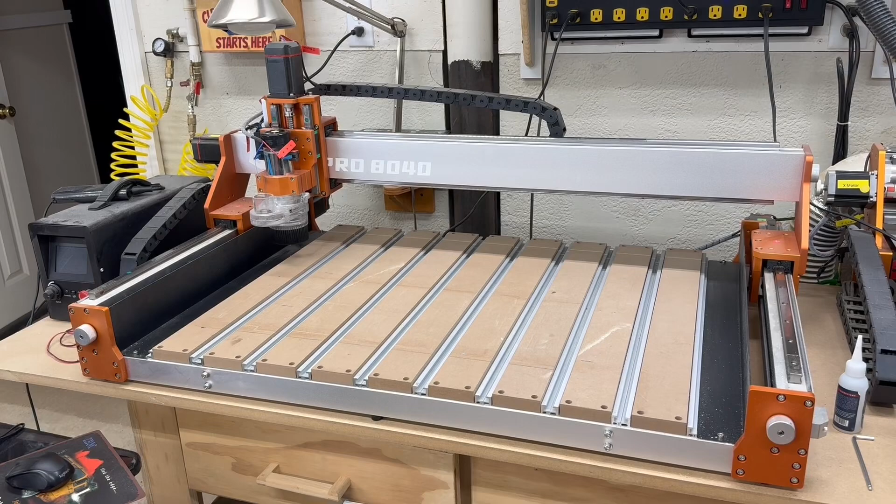Today, I'm going to be using the Fox Alien XE Pro 8040 to cut this out. I don't need to worry about having to do this all on one big sheet because I have a lot of scrap material that I want to use up. This is the perfect size machine to do this project.

I'll do one piece at a time, cut it out, put the next component on with the appropriate size of plywood, and then cut that out.

I've opened up VCarve Pro and I'm going to create a new file. This is going to be a single-sided job, and as far as the size of this material, I really don't know exactly the size yet, so I'm going to put in 700 by 700 millimeters. The thickness of the material will be 12.2, based on the measurements we took using the jig in a previous video. We are using millimeters today, and I'm going to use the machine bed to set the Z0 position.

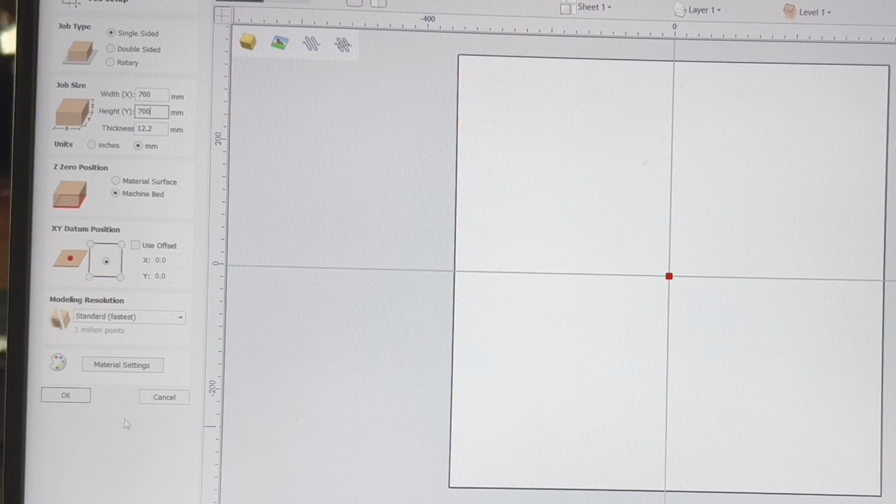I'm also going to set this up where we're working off of the center point. Later on, when we get ready to do the tool paths, I'm going to switch over and use the bottom left corner, but using the center point is much easier to do the design work. So with that, I'll hit OK.

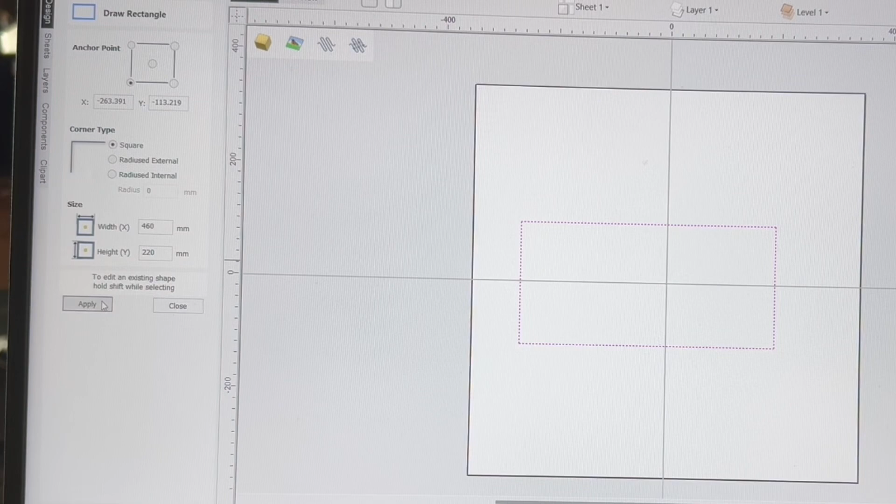The first thing I want to do is come up here to the draw rectangle, select that, and sketch in a rectangle. As far as the size of this rectangle, I want to make this 460 millimeters on the x-axis, and on the y-axis I want this at 220 millimeters, and we'll hit apply. So there is the basic shape that we're going to start with for the first shelf.

Now I want to have this centered into the material, so we'll come up here to the alignment tool and select center to the material, then close that. This gives me the references I want to be able to use to work with.

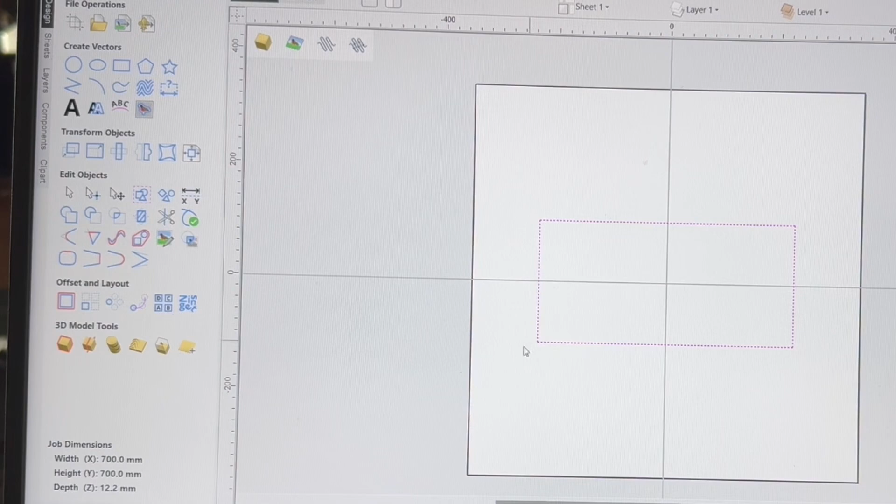The next thing I want to do is create the tabs. We're going to have 2 tabs here, so I need another rectangle. I'm just going to come right up above and draw out a rectangle. So what size do I actually need this tab?

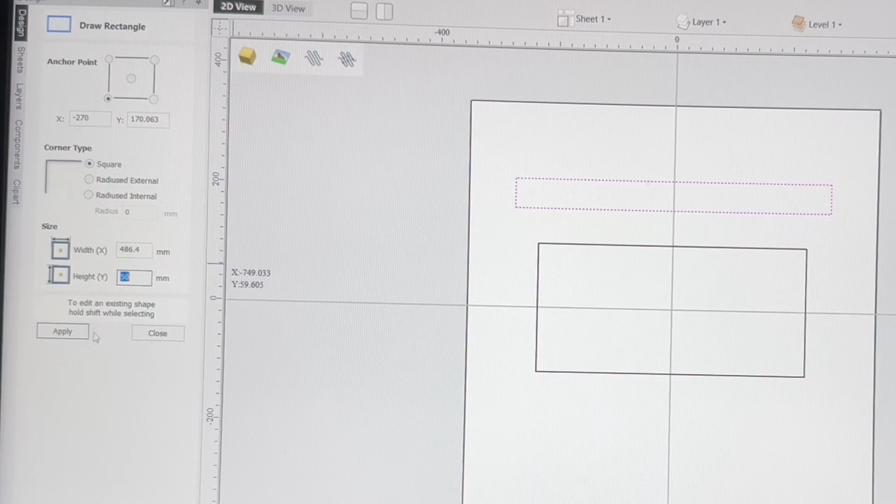I need it to stick through the thickness of the material, which is 12.2, on both sides, so that's 24.4, for a total length of 486.4 millimeters, and we'll hit tab. The thickness of this on the y-axis is going to be 50 millimeters, which will be consistent throughout the project. I'll hit apply, then close this out and slide it right down into this spot.

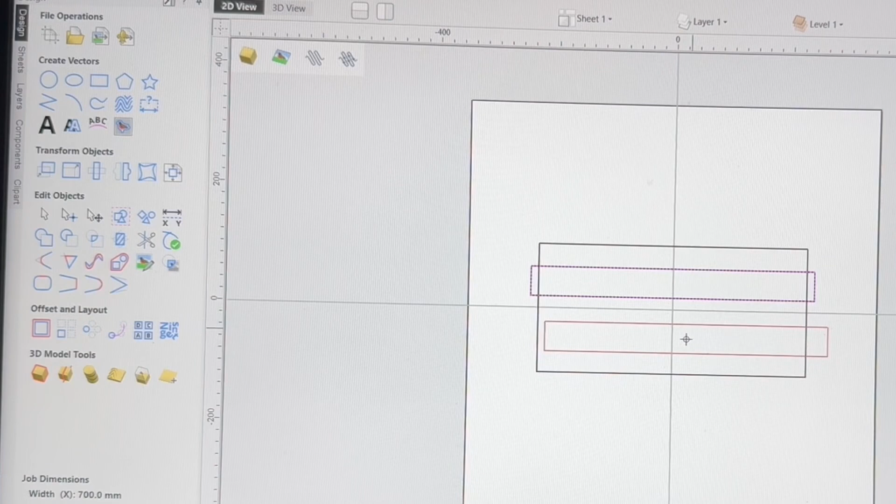You'll notice that this will snap right into the center. Now that takes care of the x-axis. I also need a second one, so I'll hit Control-C and Control-V, slide that one down, and let it snap into place also.

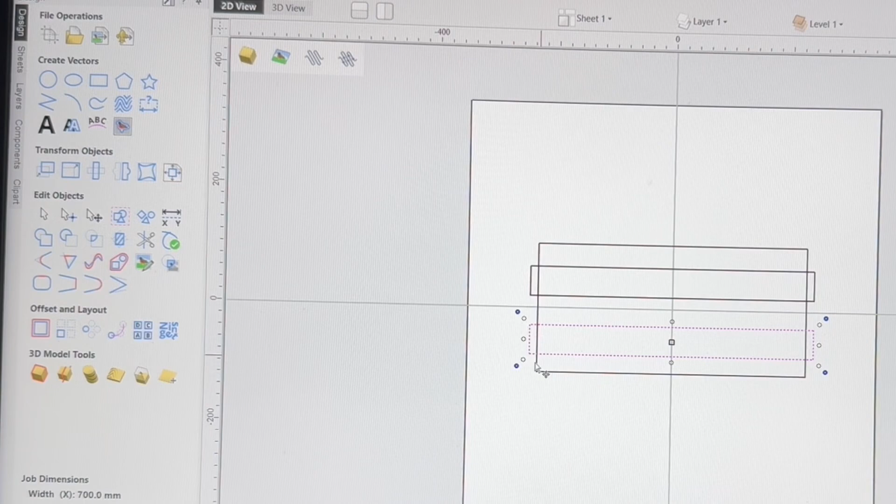Now we need to figure out how we're going to set this up on the y-axis. The easiest way to do that is knowing this is 220 millimeters, and these are 50 millimeters each, which leaves a difference of 40 millimeters between these two. I'm going to come over here to this tool, the Move Select tool.

I want to be able to click on this tab. I'm going to come up to the absolute, and I want to have this on the bottom row. It doesn't matter either one because it's going to reference off of this line, and I want to reference off my center line.

I want to be able to have this from this point to this point at 20 millimeters. So I'm going to put in right here 20 millimeters, hit apply, and that will move it down exactly where it needs to be. At this point, this distance is 40 millimeters. This will be 20 millimeters to the center line, and then we'll move this one right here.

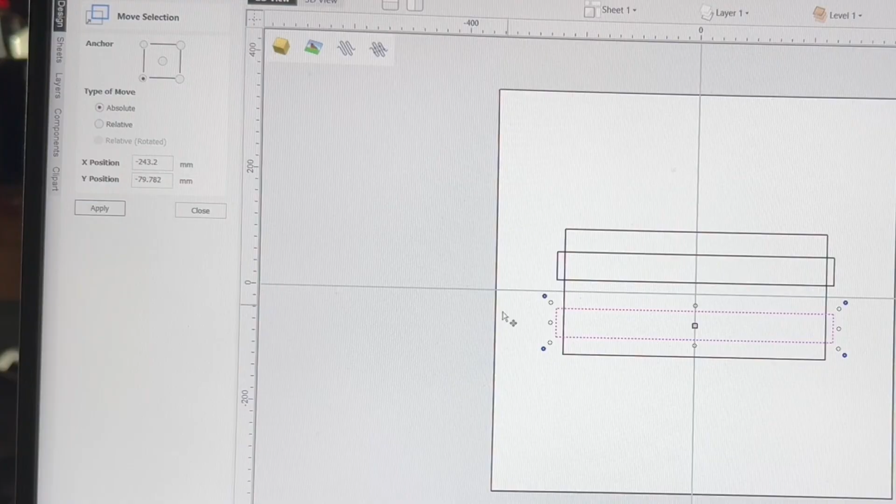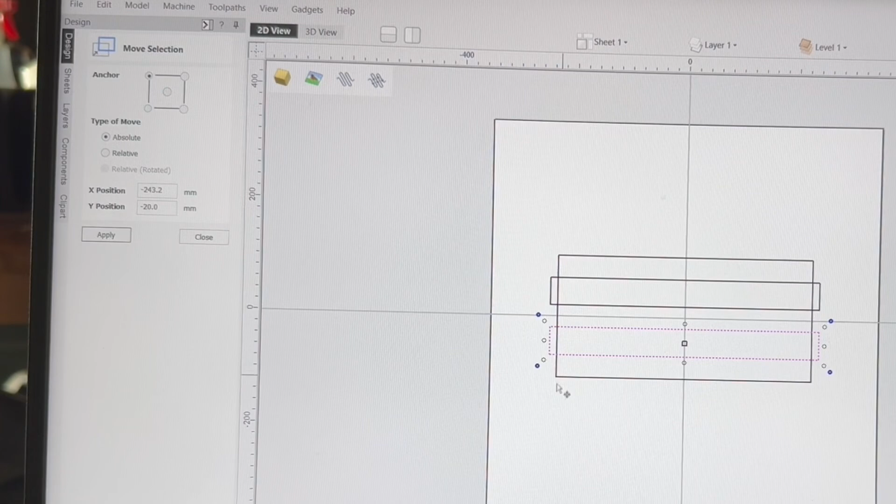Now I want to click on this one and show you how to set this one up. We need this 20 millimeters from the center line down to this point. To do that, we'll come over here to the anchor point and select the top, referencing off of the top of this line. I'm going to put in negative 20 millimeters and hit apply, and that takes care of it. So at this point, I have 40 millimeters here, 40 millimeters in the center, 40 millimeters here.

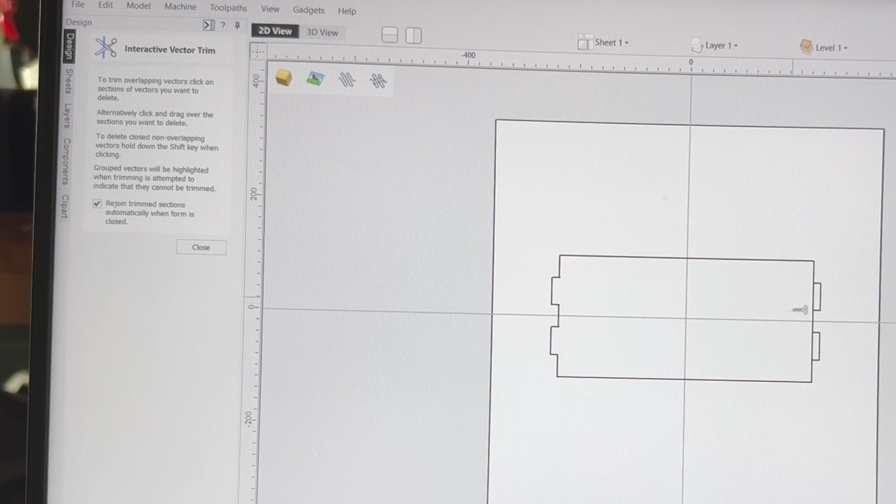And that literally takes care of the shelf. Now we have some extra lines that we need to get rid of, so I'm going to come over here to the cut tool and we'll clip these out. Control Z, we'll put that back in. Clip on this, do the same thing over here. And this is now completely done.

Now you do want to make sure that you have this rejoined the trim sections, so make sure that that's checked. But at this point, this component is finished.

Now I'm going to need a total of 4 of these shelves. Now that this component is finished, and I know that I need 4 of them, I want to highlight this and hit Control C and Control V. That will give me a duplicate, and that will be set aside because that'll be 2 of the shelves.

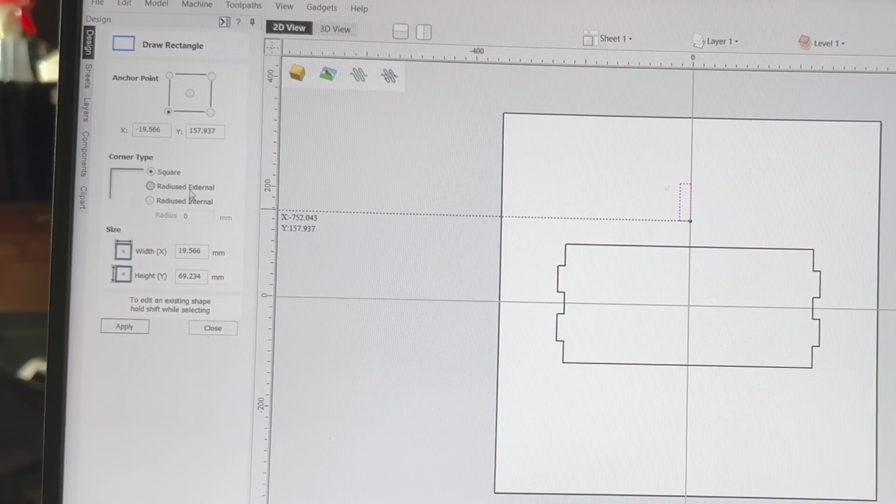Now what I have left is that same shelf, but on 2 of them, I need a slot right here in the center. So let's go back to the rectangle tool, and I'm going to put in just a slot. What size do I need? I need that slot to be 12.2 millimeters on the x-axis, and 50 millimeters on the y-axis, and I'll hit apply.

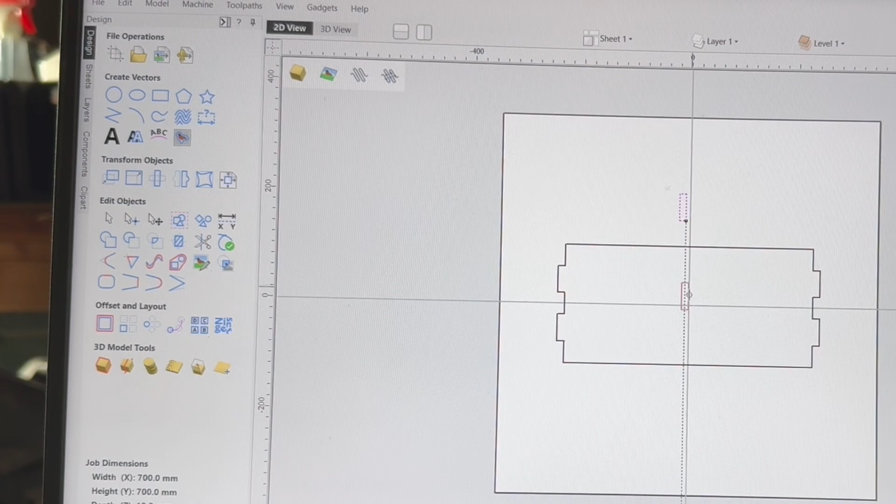With that done, I'll close it, and I'll take this slot and come right down here and center it. You can see how that snaps right into place, so I know that is exactly in the center. Now this shelf is actually complete, and I know that using these center lines, everything's exactly where it needs to be.

I do want to zoom in because there's one more thing that we need to do. We need to be able to put in the dog bones in this. To do that, we'll come over here to this fillet tool, click on it. I know that the radius of the tool I'm going to be using is 3.175 millimeters, and that's an 1/8 inch bit that I'm going to be using.

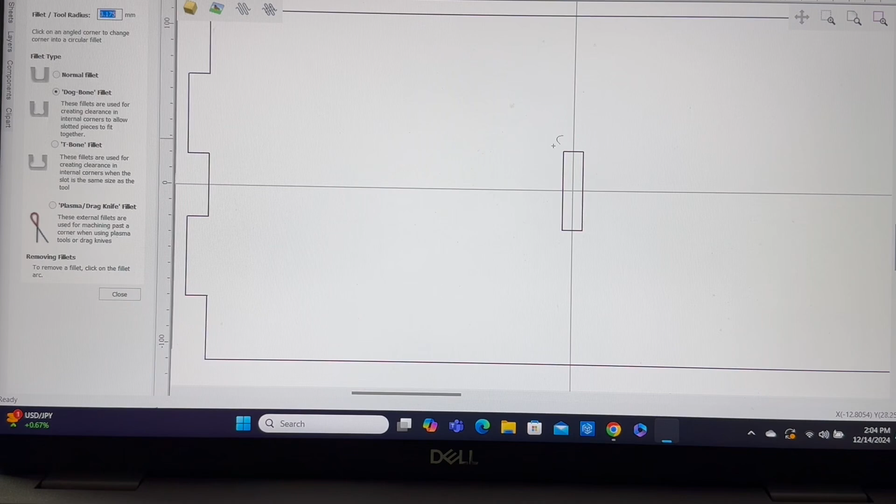I'm going to use the regular dog bones. With that done, I'll come over here, and you'll see as I get close, that check mark shows up. That's all I need to be able to do. It doesn't have to touch this, I just need to have it where that check mark will come into play.

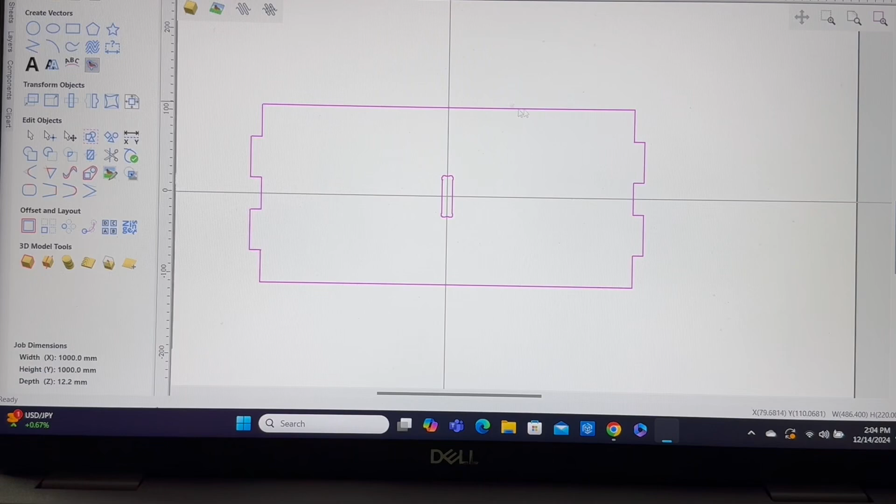And now the dog bones are in place. I can close this. I'm going to zoom back out, and now I want to be able to group this all together. And we'll click to group. Now you see how the color changed, this is now a component.

Now for all of the slots that I do, I'll be putting these dog bones in, but I'm not going to take the time to show on each and every dog bone that needs to be placed in there. It would just take up too much time.

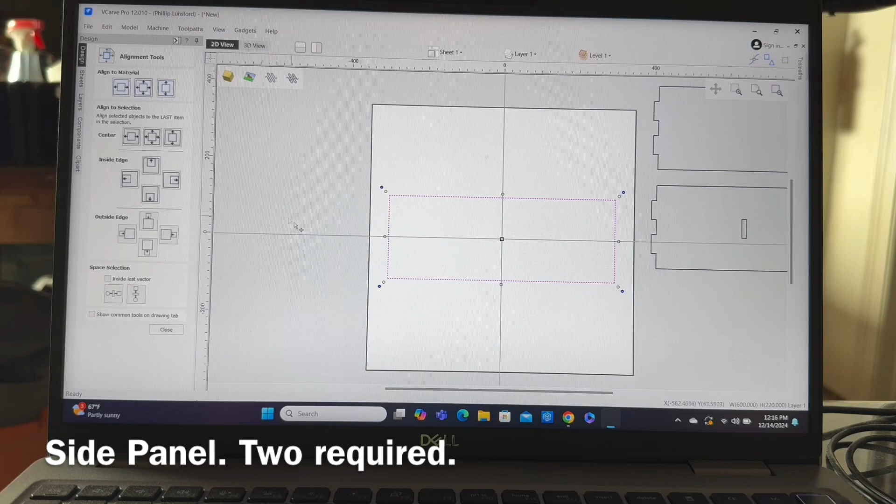I want to come back to the rectangle tool, and we're going to make another rectangle. This rectangle needs to be 600 millimeters on the x-axis and 220 millimeters on the y-axis, and we'll hit apply. Also we'll close this out, come back to the alignment tool. Let's make sure that it's dead center, and now it is. So now we have something to be able to work with.

Now at this time, we need to be able to put in all of the slots to make up the shelf. Now I need to be able to put in those slots. So I want to take this one right here, this shelf, and hit Control C and Control V. That will give me another shelf to be able to work with.

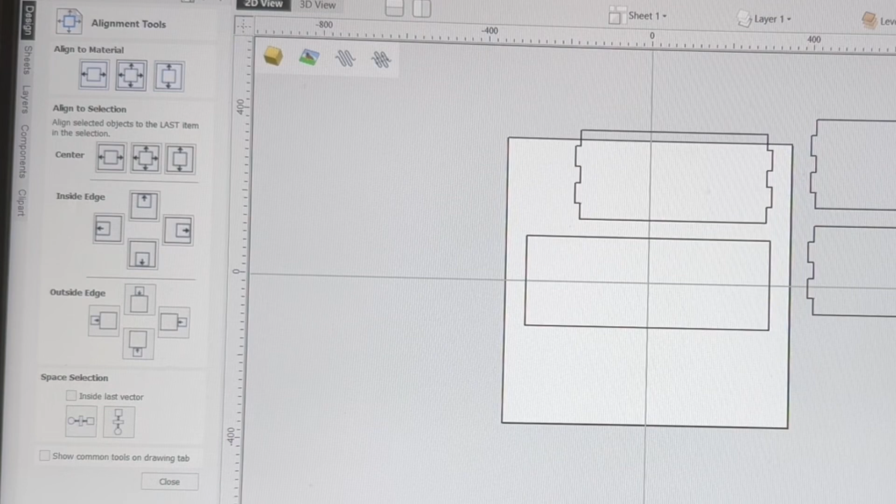Now the only thing I really need is this end where the slots are. So we're going to have the original over here, and I want to close this out now. I want to highlight this, come down to the edit node mode, and I want to come right in here, and it can be anywhere, and I want to be able to cut the vector and do the same thing down here, cut the vector. All right, so now this is going to be a separate section.

This area right here I don't need, I'll cut it. And that's it. So now let's zoom back in.

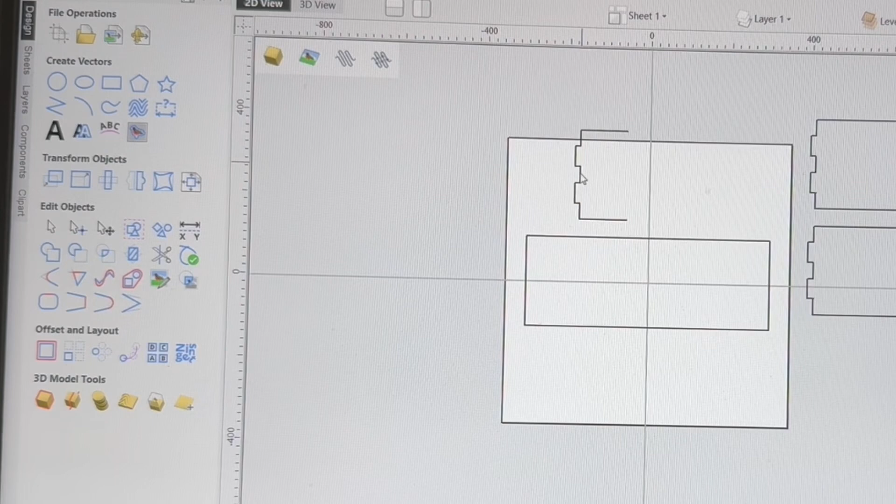I want to highlight this area, and I want to bring that down into this area. Now we're going to work off of our center and come out this way to be able to put these tabs in.

Now the first thing I want to do is align it. Let's zoom in closer where you can see that. Now right now, if you look at that, it should snap right into place.

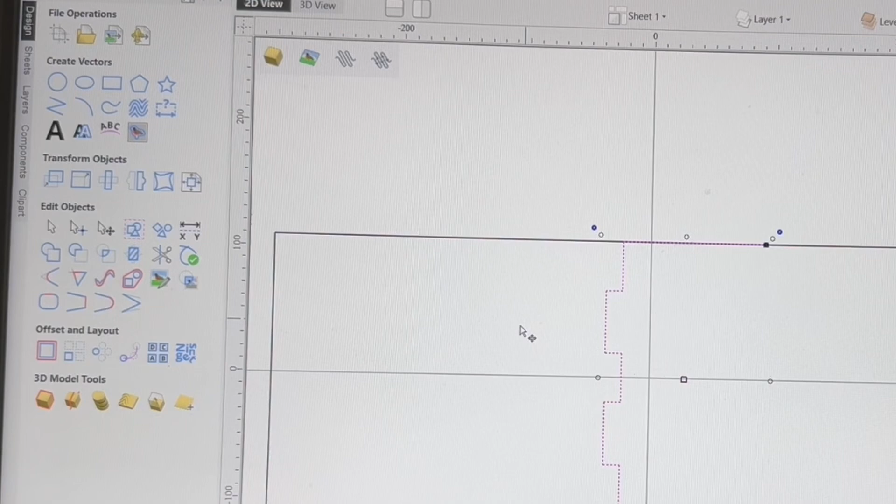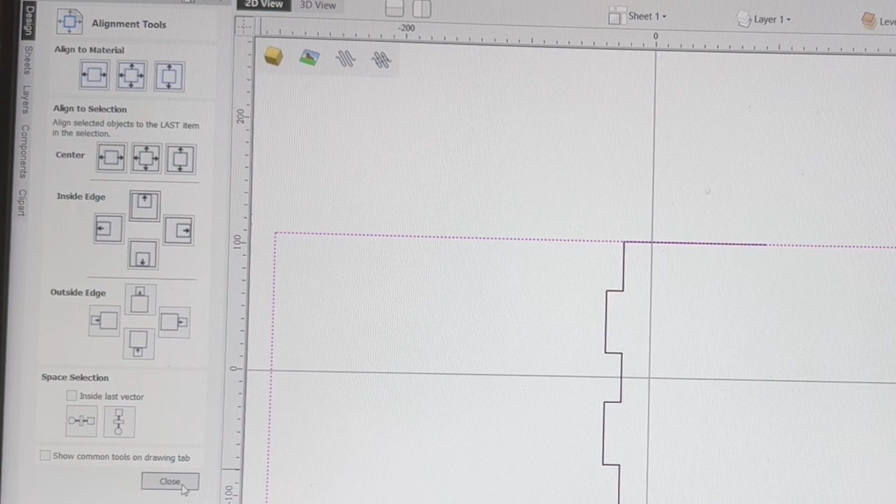To be able to make sure that happened, I wanted to go back to the alignment tool. I want to select this item, then select this top line, and come to the inside edge. You can see the snapping of this center point worked, but this verifies that it's exactly where it needs to be. Now I need to make my slots, and they're going to be this size right here.

So I'm going to take my rectangle, and I'm just going to drop one in close right here, and let's put in the measurements. I know that slot needs to be 12.2 millimeters by 50 millimeters, and we'll hit apply.

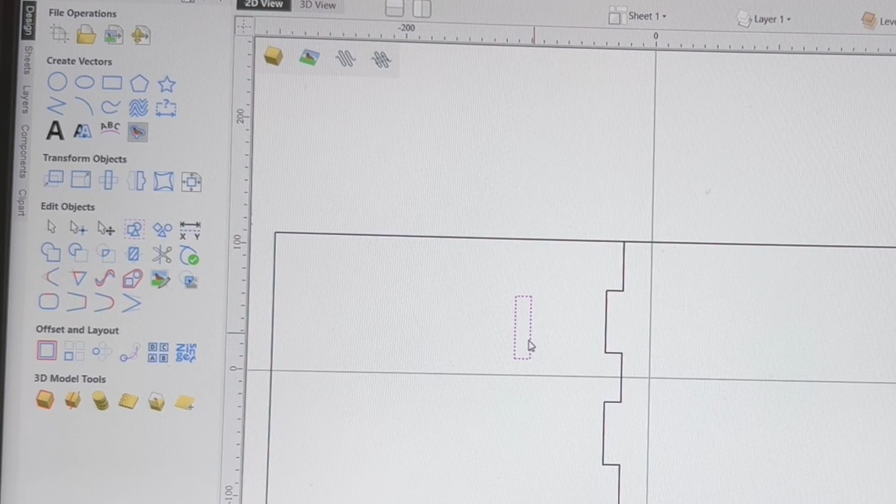I want to make a copy of this one, so Control C and Control V, and we'll slide this down here. So let's take this first tab and slide it right over to here.

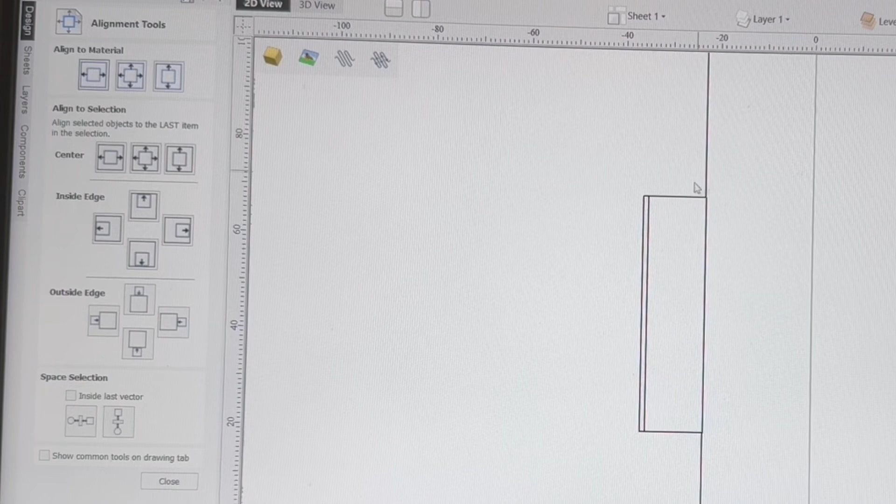Now this snapped to the center on the y-axis, but I wanted to make sure it did not snap to the x-axis so I could show you this. So I want to click on the tab itself, hold down the Shift key, click on the object itself, and this time we're going to align it to the inside edge to that point. And you can see how that gives you the perfect alignment.

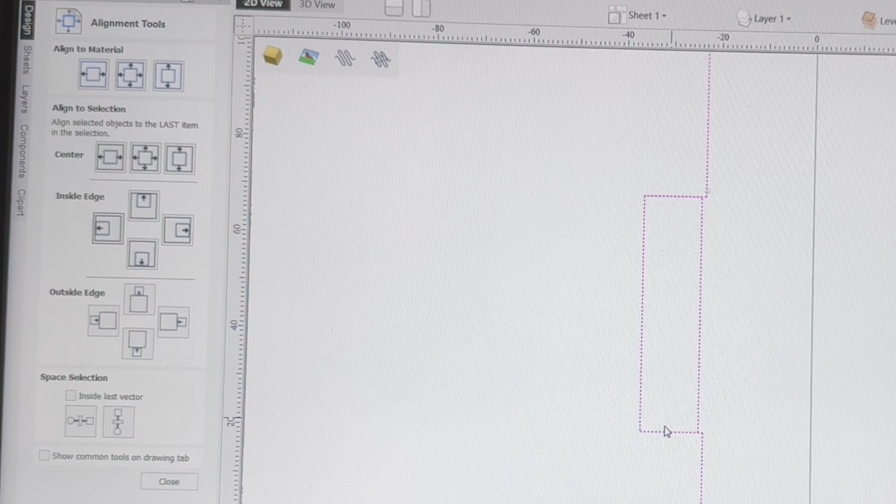Now I zoomed in real close so you can see it, and this snapped right over here to where it needs to be. The only thing I need to do is align it to this. So we're going to come back to the alignment tool, and I'll click off of it so I'll show you the whole process. We'll click on the tab, hold down the Shift key, click on that, and hit this. And that brings it over exactly where it needs to be.

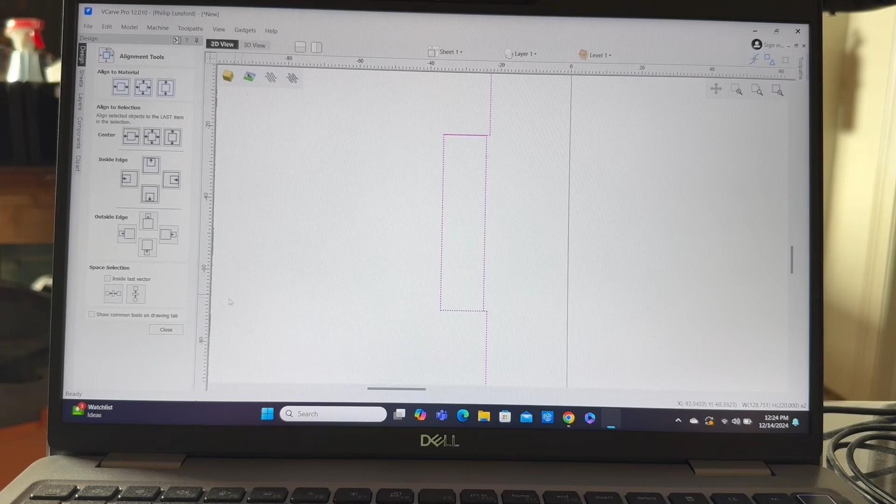Now you can see both of the tabs are exactly where they need to be. The next step is I want to group this together. We'll close this, come over here to the Group tab, and now we have one object.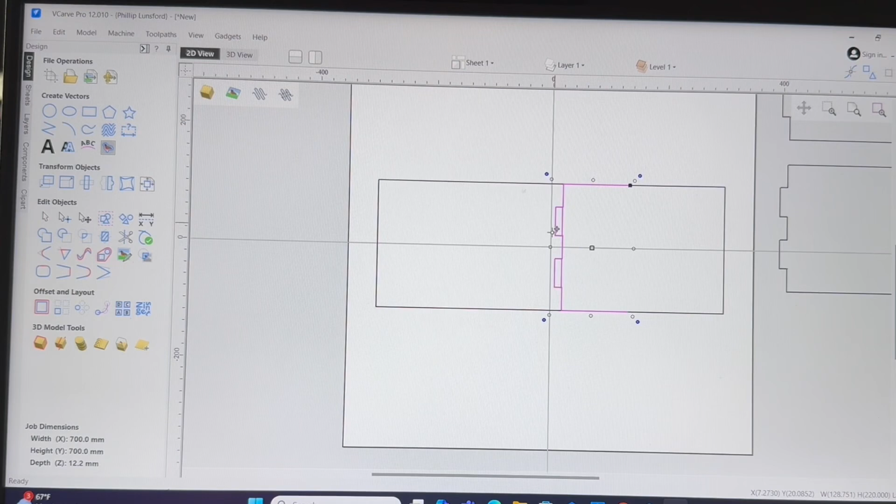So now I can move this anywhere that I want. So I want to be able to reference off of my center line again. I'm going to zoom out just a little bit, and we're going to start putting in the tabs. You can put these tabs anywhere that you want, depending on the size of the shelf. Now if I put this right into this area, this will identify the first location of the tabs.

Now if I want to see exactly where that is, bring over a guideline and you can see it was minus 220. Again, you can see the minus 220 there in that box. So that's two ways that you can see exactly where it's located. Now I don't need this guideline, so I'm just going to click on this and delete it.

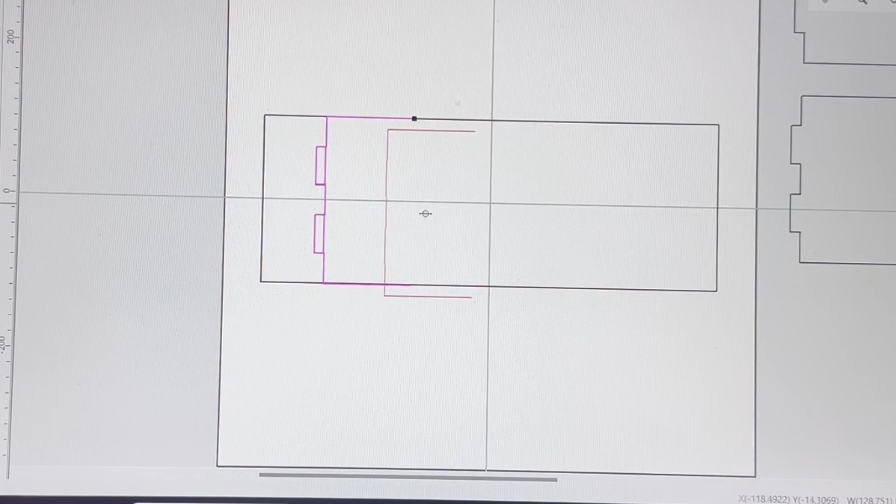And then I want to be able to make a copy of this. So Control C and Control V. I'm going to slide this down. Now at this point, let's use the Move Selection tool.

I'm going to come over here and watch this. I want to have this on the absolute. I want to have it on this side, and that's 109 on the x-axis right now. We're going to leave the y position alone, but I'm going to move this up to 120. So that's going to be a minus 120, and we'll hit apply.

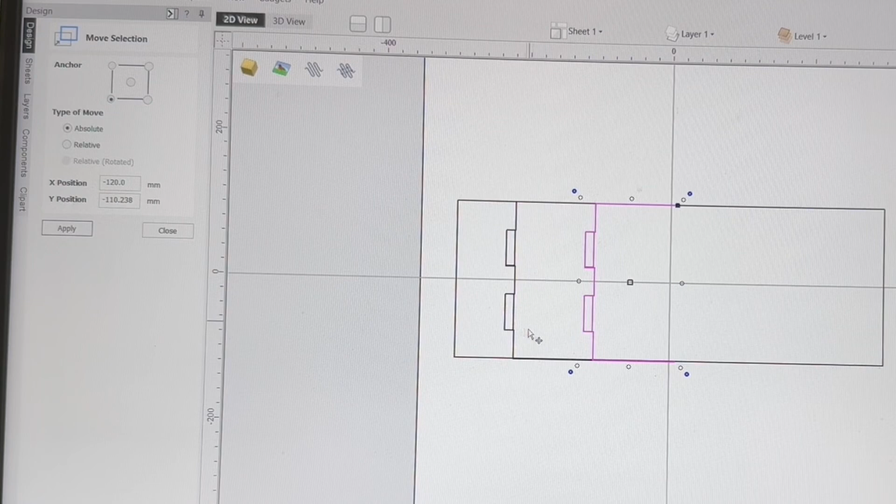And you can see how that moves it right where you need to have it. So now I'm going to do the same thing. We'll close this. What I'm going to do is make a copy of this, Control C and Control V, and we'll slide this down.

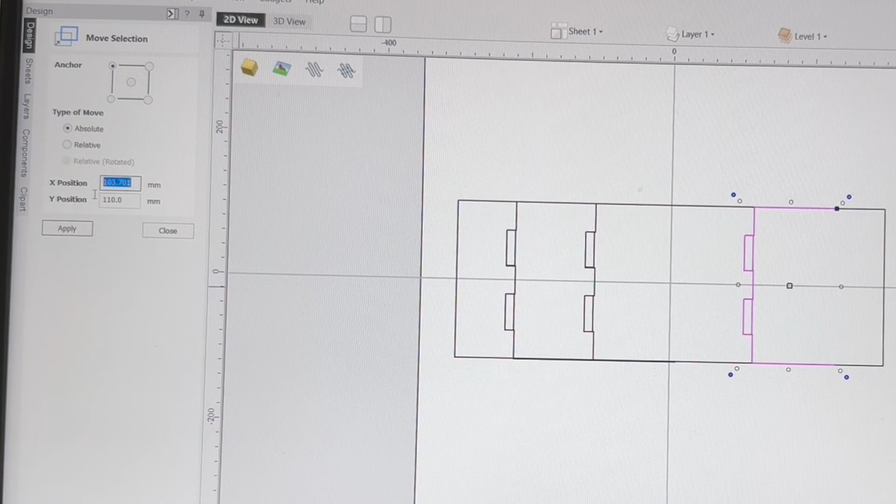Now if I want to keep this symmetrical, I want to take this one right here, come back to Move Select tool. We're going to make it absolute again, and we'll click on this left side, and I want to apply this at 120. So that's going to be 120, and that's going to be on the positive. We'll hit apply, and that now has equal spacing from here to here and here to there.

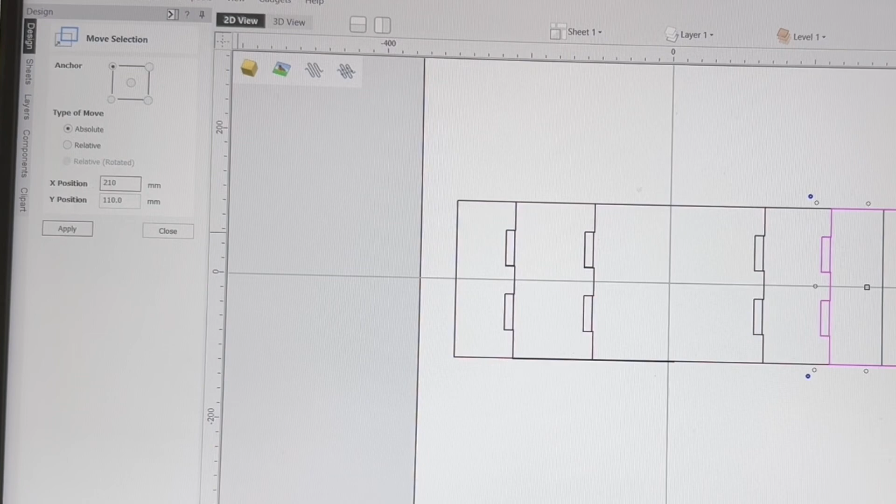Last thing I want to do is Control C and Control V, and we'll do the same thing again. We'll slide this down, and we're going to measure from the center point, over to where the tabs need to be, using 210 millimeters this time. I'll type in 210 and hit apply. That will move it right over to where I want it, and then I can hit close.

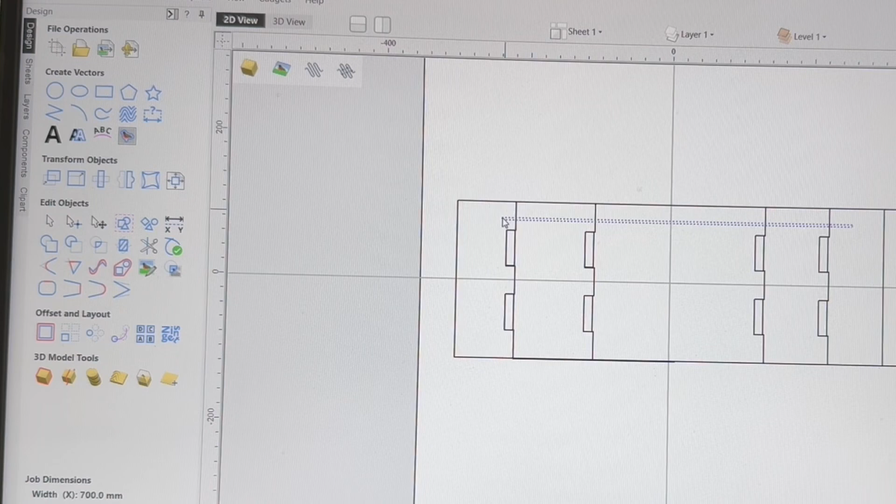That has all of the tabs now in place where I want them. The next step is to be able to highlight all of these tabs and the little components we're using for the alignment, and ungroup them. Then I want to come in just to that little section and delete the guideline that we had, and that leaves all the tabs in place.

Now I also want to put a back in here, and I want that back to be recessed so that I can have the cords hidden for as much as I possibly can. So we're going to have this set up at about a 40 millimeter depth. That should be able to handle all of the cords.

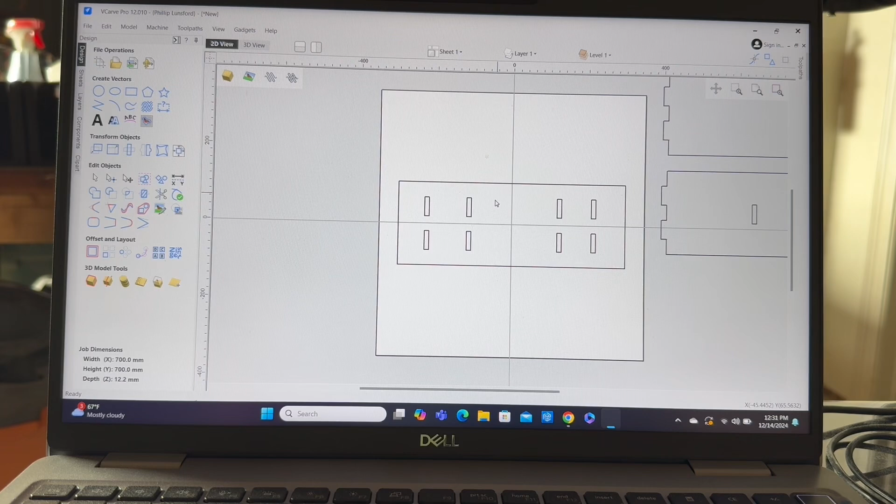But what I need to be able to do, let's zoom in. Let's come over here to this measure tool, and let's measure from right here over to this point right there, to the edge of that shelf, and that's 227.4.

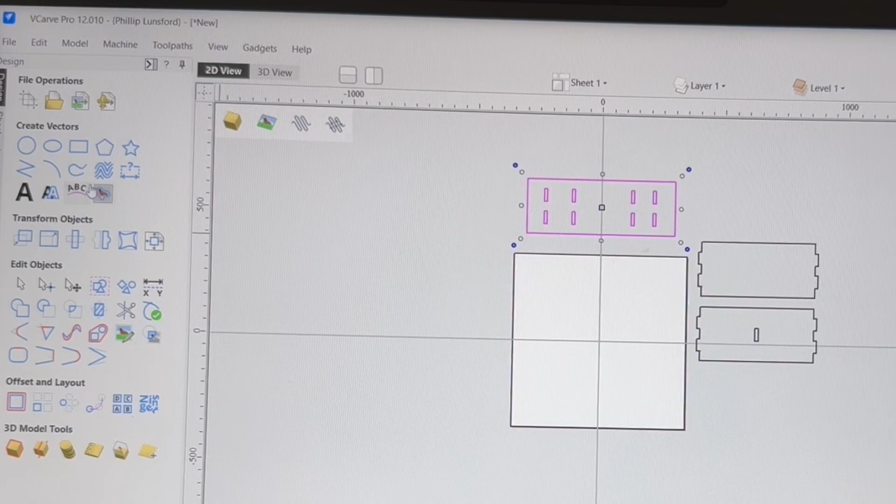Okay, now that I have the shelf out of the way, I want to be able to make the backing, that backboard that's going to go right into this area. So let's go up here to the rectangle tool, and we need to make that shelf, or that backboard actually. So we know that needs to be, so let me zoom back in so we can see this a little bit better.

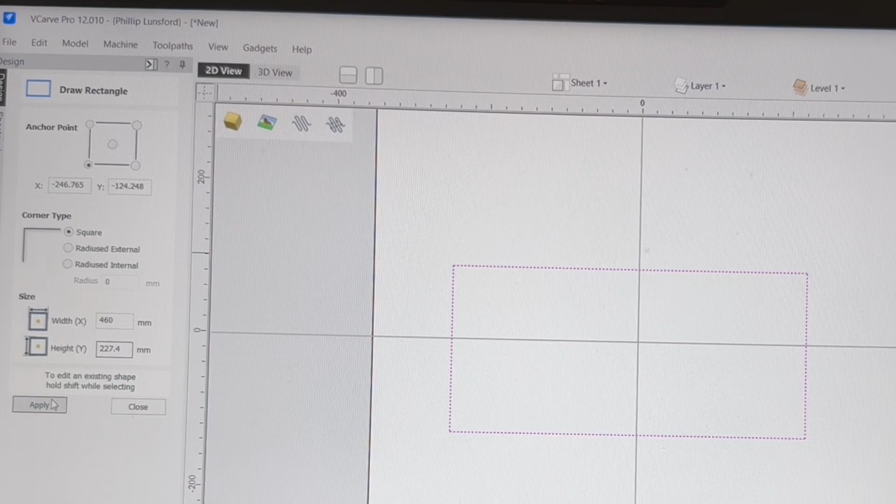So we know that on the x-axis, that is going to be the 460 millimeters. And on the y-axis, we just measured that, and that is going to be 227.4 millimeters. And we'll hit apply. So that's going to take care of the shelf.

We'll close it just like we did before. We'll hit the alignment to make sure that it's centered to the material. Close that. And now we need to bring in the tabs.

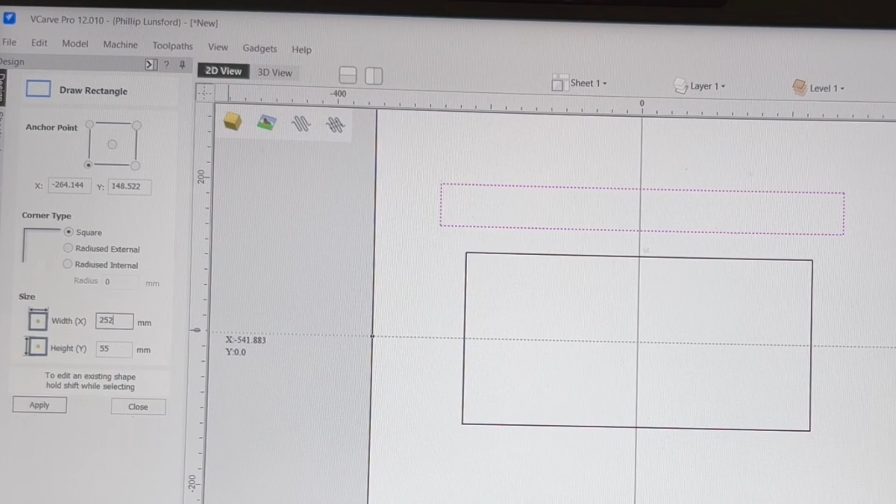Now this is created exactly as we made the shelf before, so I'm not going to go through the repetition of creating another one. We're going to skip to the end, and I'm going to show you how we're going to set this up to put the tabs in place.

Okay, at this point, the backboard is completely done. Now I want to first make a copy of this. So Control C and Control V will give me a copy, and I'll set this out of the way because that is going to be a component that we'll need to cut out.

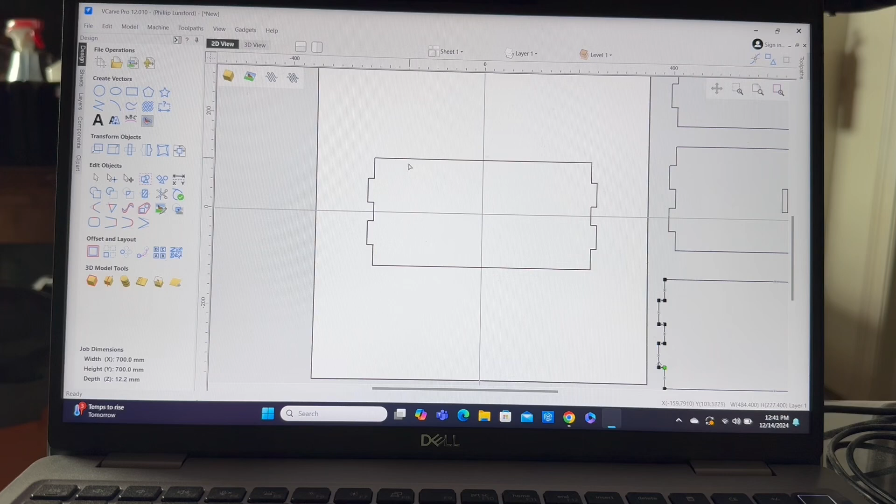Again, we're going to go over to the edit node. We're going to do the same thing. We'll click on here, cut the vector. Same thing down here, cut this vector, and then we'll go back to this tool and cut it away. We don't need that. So at this point, we're going to do the exact same process that we used to be able to place the tabs in all across that side panel.

Again, I'm not going to repeat that. Let me just show you the final step. So here we aligned it to the top of the edge to be able to give a precise measurement that we can measure down to 40 millimeters.

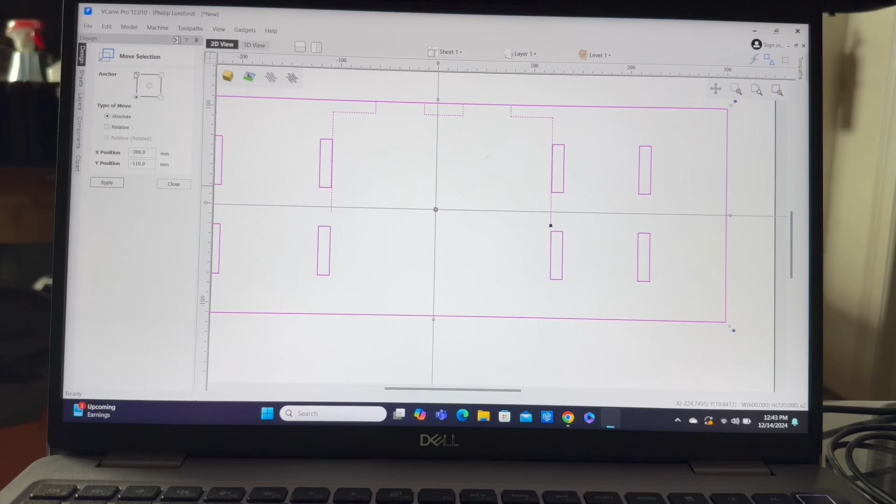So we can take this number of 110 and subtract the 40, and that will give you 70. So you can type in 70 millimeters. The reason it's 70 is actually from the center line of the board up to that top edge. So with that done, you can hit close, and that is the location for each of the tabs.

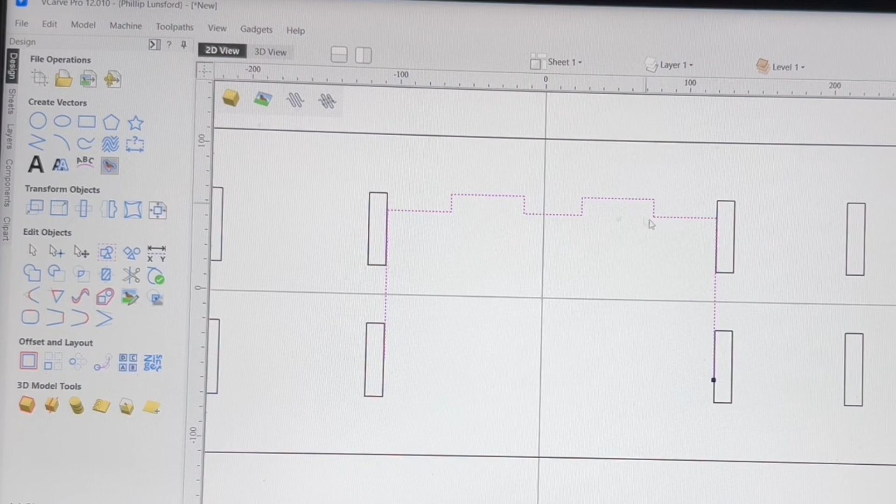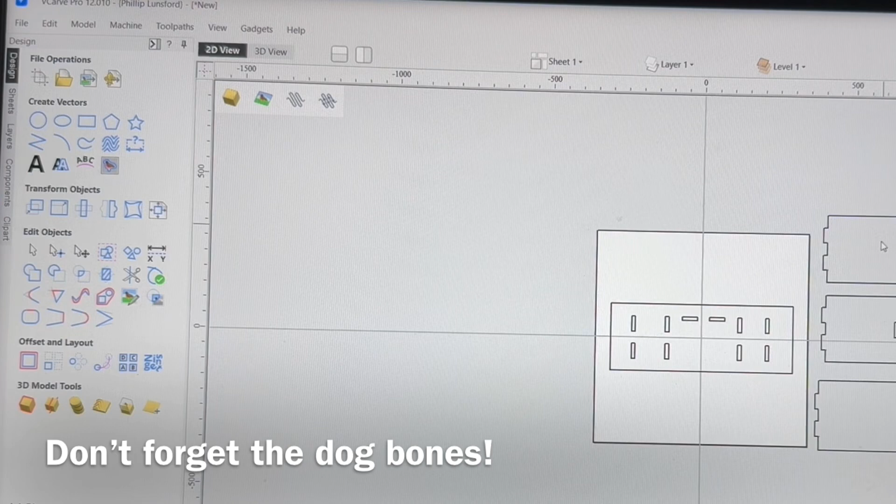Next, create the tabs and drop them in place as we had done before. No longer need this guideline, so we'll highlight it and cut that out, and that will leave the tabs in place. That process is done. You now have the tabs on this backboard. And don't forget to put the dog bones in. This is an important step that I said I was just going to skip, and we're going to move ahead.

The last step is to create the divider between the shelf where I'm going to have a drawer. So I need to measure this, and with that measurement, we'll create the rectangle and be able to make this last component. Now it's back to the draw rectangle. I'm going to put my rectangle right here in the center. And now I need to be able to put in the exact measurements.

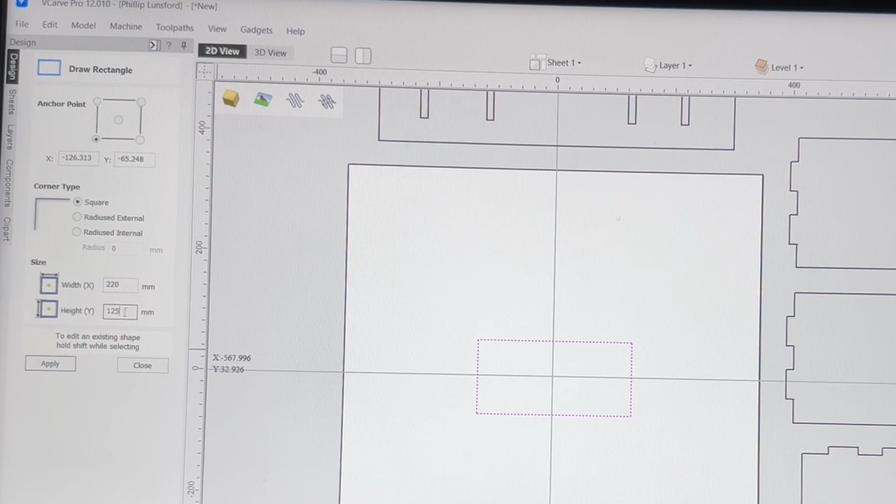We know that on the x-axis, this is going to be 220 millimeters. We'll type that in, and then we'll come down on the y-axis with that measurement that we just took. It's 77.8, and we'll hit apply. So now we have the basic rectangle. We'll close that out, come to the alignment tool, and make sure we have it centered on the material. Now that we have it centered, the next step is very, very easy.

Just as we did before, we're going to grab the rectangle tool and make a rectangle. That rectangle is going to be 50 millimeters wide, and on the y-axis we need to put in 77.8 plus 24.4. Hit equals, and that will give you 102.2.

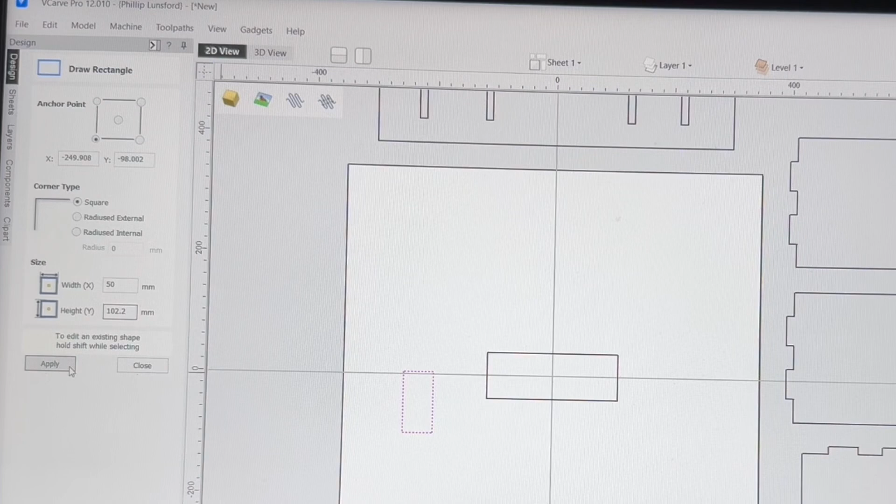That's another way you can do it, instead of just adding it manually, let the software do the adding for you. And then we'll come over and snap this right into the center, and working with the center lines such as we have, it's all done.

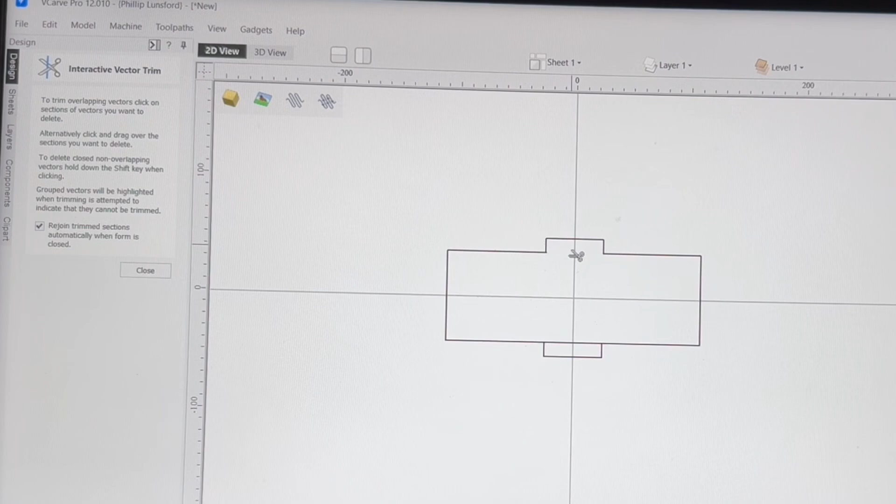All we need to do now is just take the tool right here and clip away the parts that we don't need. And this component is now done.

Next thing I want to establish is the tool paths. Now I have this down in the bottom left hand corner, and I still have the center point. I want to come up here to the job setup menu, come down and change the XY datum position, and I'm going to change that to the bottom left hand corner, and then we'll hit OK.

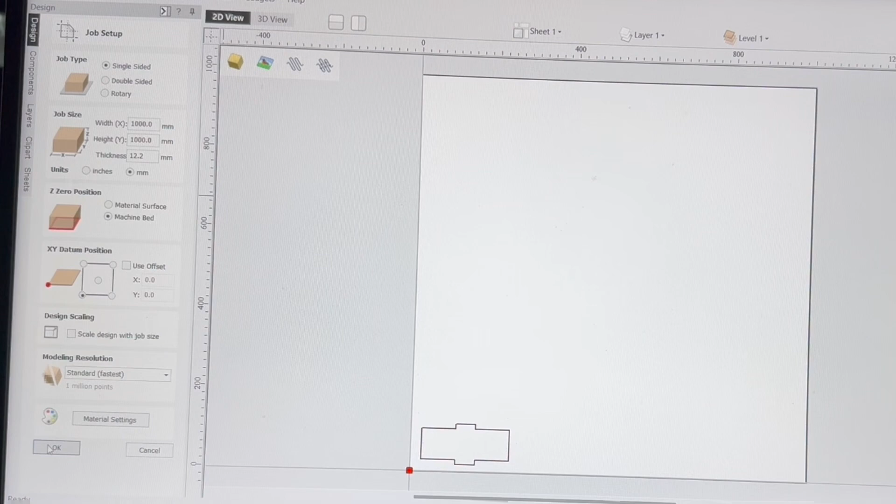And then I'm going to switch over to the toolpath menu. Let's highlight this right now, and we'll close this out. What I want to do is be able to use the profile toolpath.

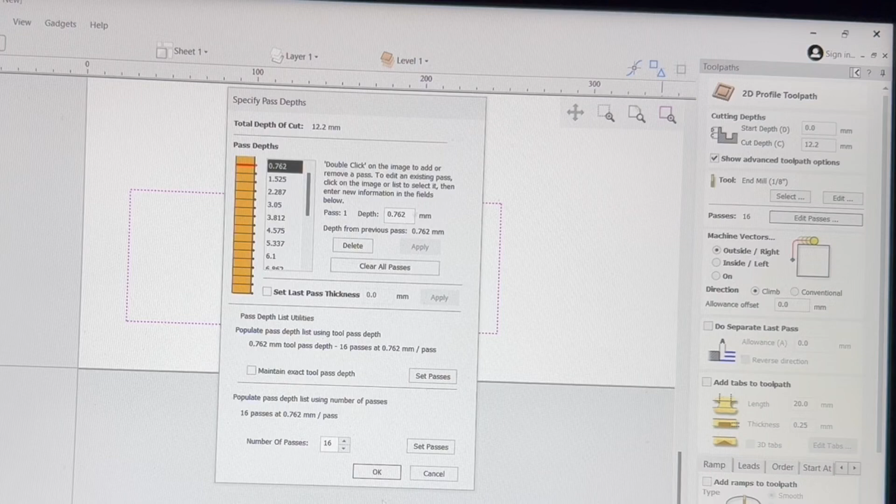So we'll click on that, and we're going to hit the start depth as 0. We're carving down 12.2, which is the thickness of the material, and we're using the 1/8 inch end mill. Now it shows 16 passes, but certainly don't need 16 passes, so I'm going to edit that down to 3 passes. That works real well with this bit and this material.

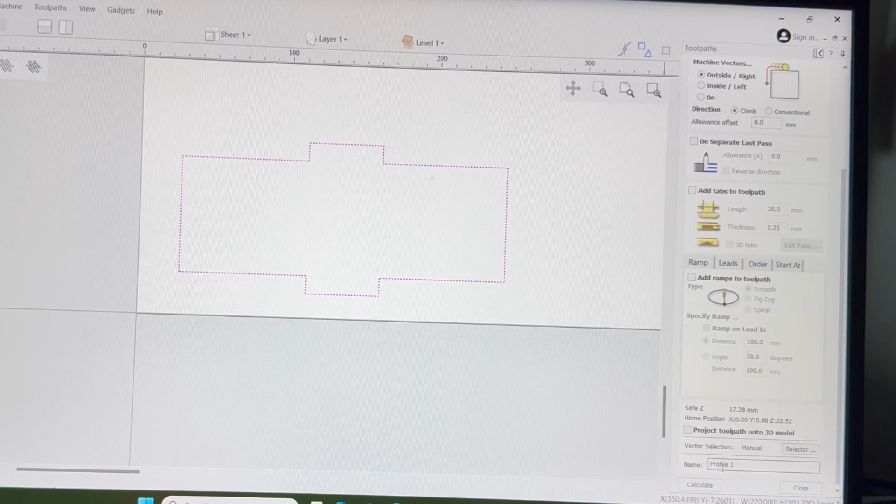I'm not going to do anything else here. You do want to make sure that you are on the outside cutting, because that would be critical. And then from there, name this any name that you want, and then you can hit calculate.

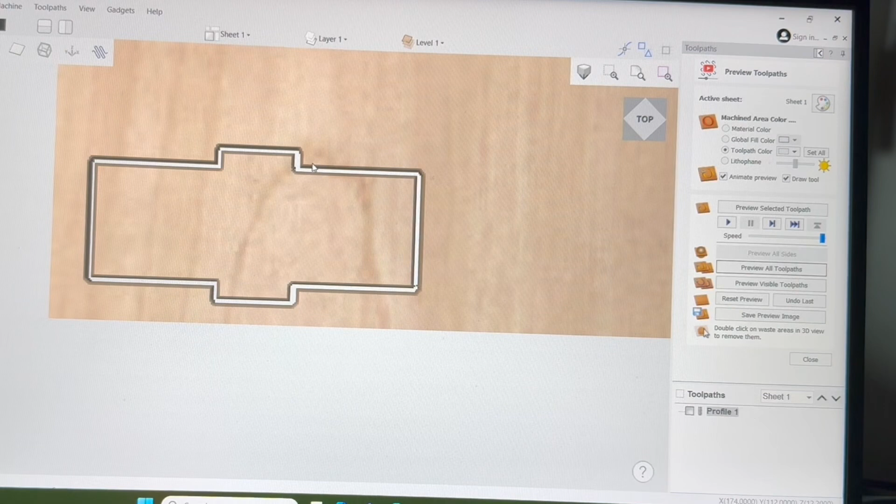So this is the tool path. Let's hit reset, preview all the tool paths, and you can see this is cutting all the way through. I'm not using the tabs because I'm using the glue and tape method. So let's go ahead and take this over to the machine.

Next step, we will save the tool path. We need to make sure we click on this, click on this icon right here that says Save Tool Path. You'll see that tool path is showing up right here. Then I can save this.

Now because I've already done it, I'm not saving this again, but this is saved on my thumb drive, and this is what I'll use to be able to cut out this part. So let's get this part cut out, and I'm going to show you how to cut out one more part, and everything else will be exactly the same.

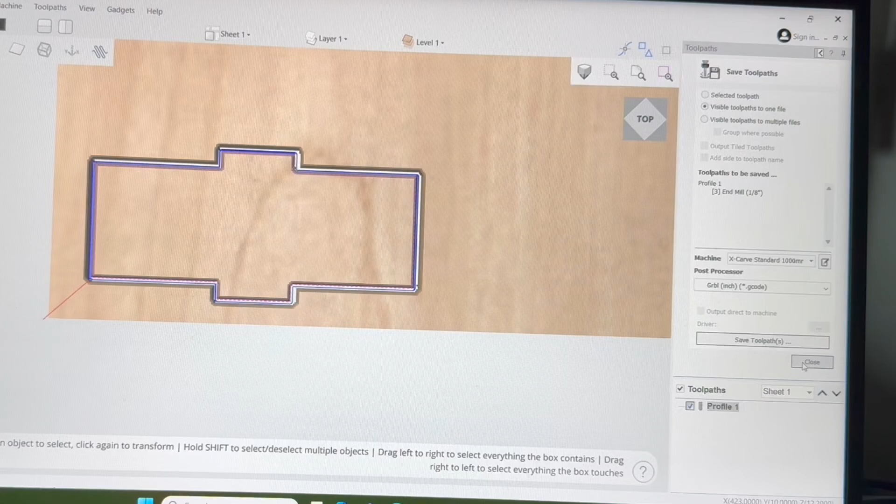I have the Fox Alien XE Pro 8040 all set up now with a scrap piece of wood that's large enough to be able to cut out this part. And of course, I'm using the OpenBuilds controller, and I'm ready to hit start. And it begins cutting this part out.

Now this part will take 3 passes to be able to carve, and I'm also using the vacuum system on this particular one to be able to capture all of that sawdust. Now this is finishing up on this 3rd pass, and it will come right back to the XY 0 position. So there it is, it stopped, and that part's finished.

With the glue and tape method, holding this down, it holds it very secure, and it has never failed me. But this is the completed part right here, so this is part number 1. I'll reset up everything, find another piece of scrap material, and we'll cut the second piece out.

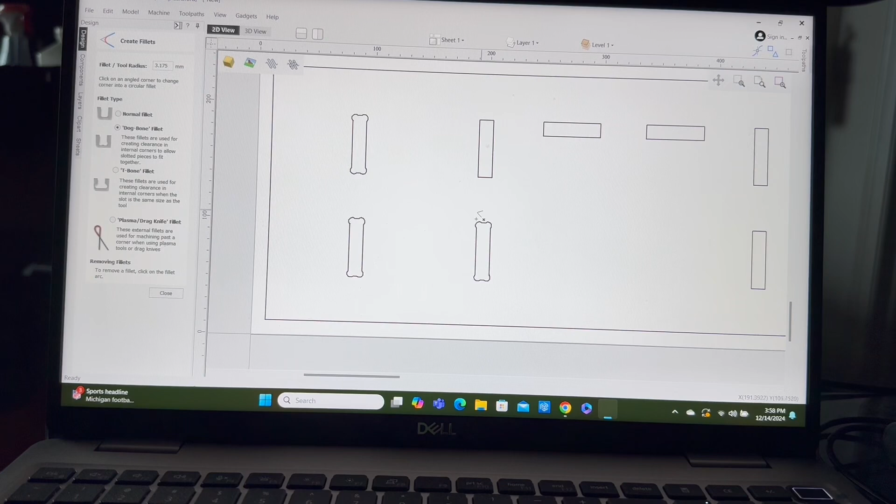Now I said don't forget to put in the dog bones. We're going to go ahead and do that right now so I can show you exactly how we're going to cut that out. So I'm just going to go through, click on all these corners, get these in, and I'll be right back, and we'll show you how to set up the tool paths on this process, because these tabs will get cut on the inside, and of course to cut out the side panel itself, we'll be cutting on the outside.

The dog bones are now all in. Now if you remember, I had grouped this whole entire panel together, and that made it easy to be able to move around. But when I was placing the dog bones into position, you have to ungroup it.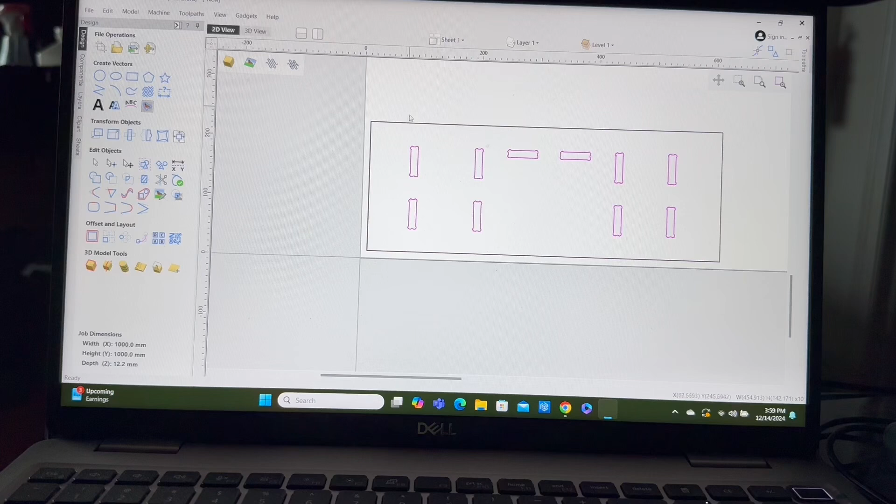With all the dog bones in place, I now want to be able to highlight all of these slots. All of this I still want to have grouped together. So with all of them highlighted, I'll hit the group icon, and now those are all one component. Now the outside of this panel is still not grouped together, but that's okay, because that's literally setting up for having the 2 tool paths that I need to create.

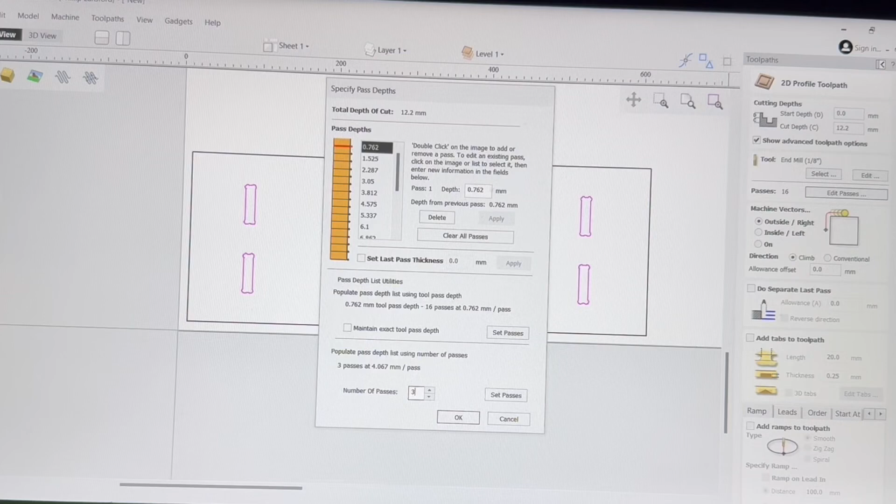Now the first tool path that I want to do are these slots. So I'm going to come right back up here to the profile tool path. Same thing, 0, 12.2, 1/8 inch end mill. We're going to edit the passes down to 3. And this time we're going to cut it on the inside. Very important, because otherwise the slots will be the wrong size.

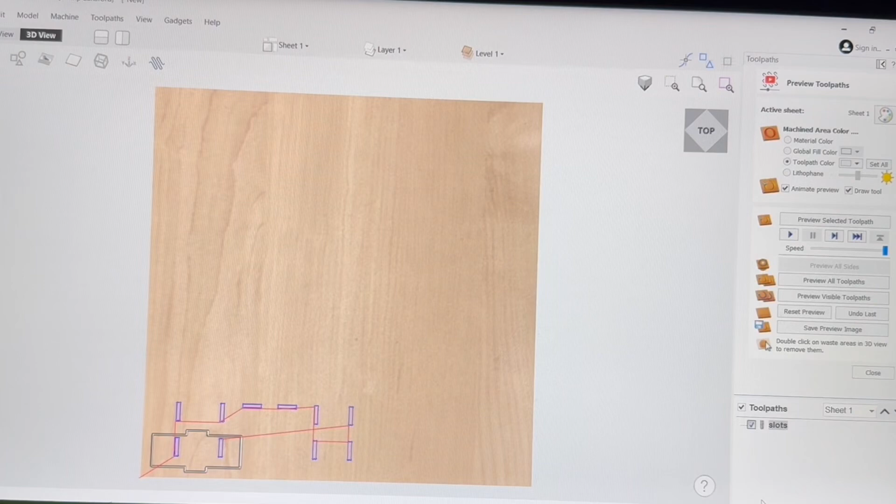Everything else is fine, so we'll come down. Again, we'll just type in the word slots. It doesn't matter what you name it, whatever works for you, and we'll hit calculate. We'll hit reset because our previous one is there, so that is now gone. So all of those are in position. So let's close this out now, and we'll go back and we'll highlight this one, and let's do the outside.

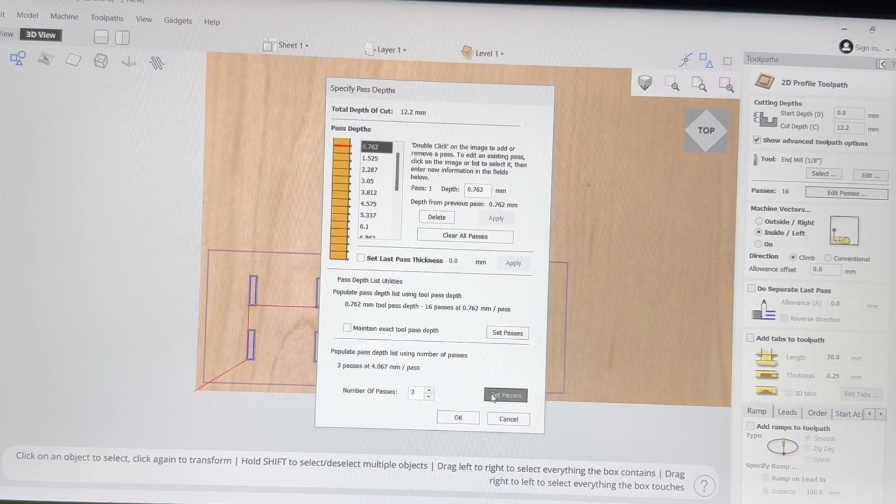All of this is the same. We'll need to edit the pass, we'll put it in 3, we'll hit set pass, okay. We're cutting this on the outside this time. And we'll do this as, well, we'll just leave it as profile for now. And we'll hit the calculate.

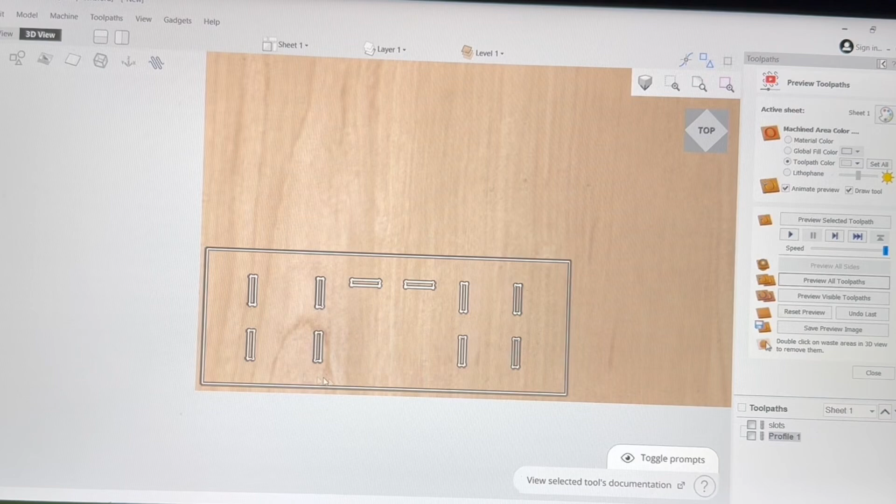Now we'll reset and preview all of the tool paths, and you can see now everything is cut out. When it comes time to saving the tool path, we'll close this, select it, and now you see the slots. That'll cut out first. The profile for cutting out the entire panel will cut out second.

So I can save this, and again, it'll be saved to the thumb drive, and I'll use that to be able to take it to the machine.

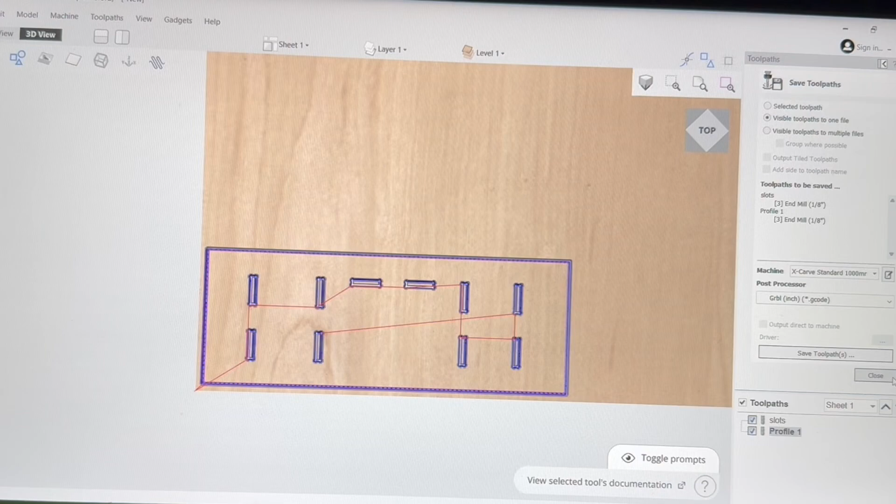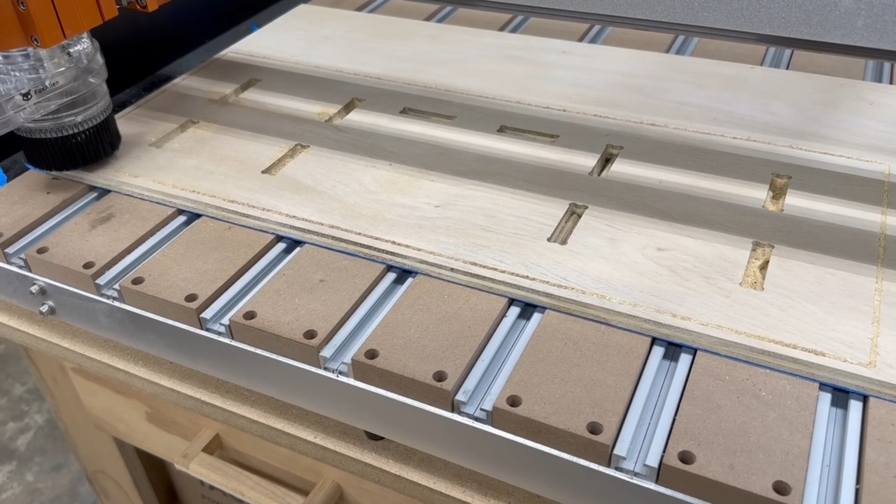You can see at this point that all of the slots are cut out, and I'm in the process of cutting out the full panel now. Again, this was 3 passes to be able to do this, and it's actually running both tool paths. You can do that when you're using the same bit. And I set it up so that the slots were cut first, and then the outside cut out so that everything stays right in place. And again, this glue and tape method holds extremely well.

It's time to be able to assemble this cabinet. And what I'm going to do is start with this divider on these bottom 2 shelves, and so that will just drop right in there. I'll put this other shelf right on top of it, and it's a nice snug fit.

And that's one of the things that I really like about building cabinets this way. I can actually test fit everything, and I know that it's going to fit together and it's going to hold extremely well. And I don't have to worry about, at this point, glue and nails and trying to keep everything square. These tabs and these slots fit in absolutely perfectly.

This back drops in, and you can see it's firmly against that shelf, and that's what I want. Now I put in the top 2 shelves, and again they just drop right in place. And then the last piece is that other panel.

Now that other panel is a little bit tricky to get in there because you've got to line up every one of these slots. And with this it's going to take just a little bit of the rubber hammer to just tap everything in place. But the first step, of course, is just slide these shelves over and get everything aligned right at those slots. Once it's all aligned, you'll see just how easily it is for these to go in place.

Now I'm filming this in real time. I'm not doing anything to speed up the video. This is real time, and this is working out extremely well. So at this point, this cabinet is put together as a test fit without any glue and without any nails, and it holds together extremely well. I really like having this type of construction to be able to make cabinets in the shop.